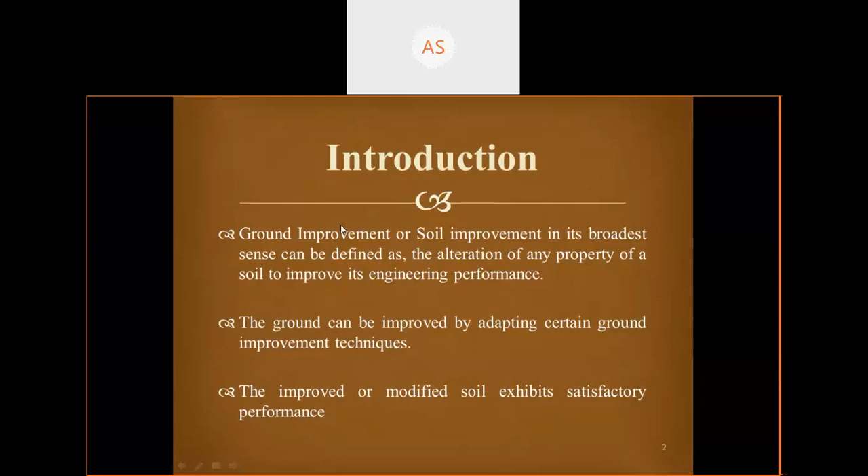Okay. So, all kinds of soil are not suitable for construction purposes, right?

These people are waiting.

So some soils are very weak and cannot support the structures. That kind of soil needs improvement. By applying certain techniques, the engineering properties of the soil are improved, and the application of those techniques to improve the ground so that it supports the structure on it is called ground improvement techniques. So it is the modification of the engineering properties of the soil so that it is suitable to take the load of the structure.

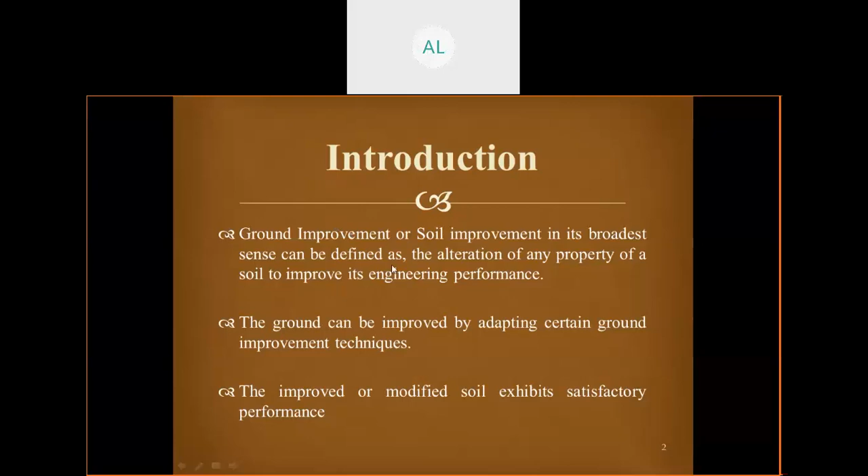Any structure, it may be a building, bridges, also construction of roads. So these types of techniques are available. It is written, you see, the ground can be improved by adopting certain ground improvement techniques. Then the improved or modified soil exhibits satisfactory performance. So after application of those techniques to modify the engineering properties, the soil should give satisfactory performance. So that is our introduction about ground improvement.

I hope it is clear. Anybody? Any doubt till this much? Is it clear to you? Any one or two, you can just unmute and say. Yes, ma'am. Clear. Okay.

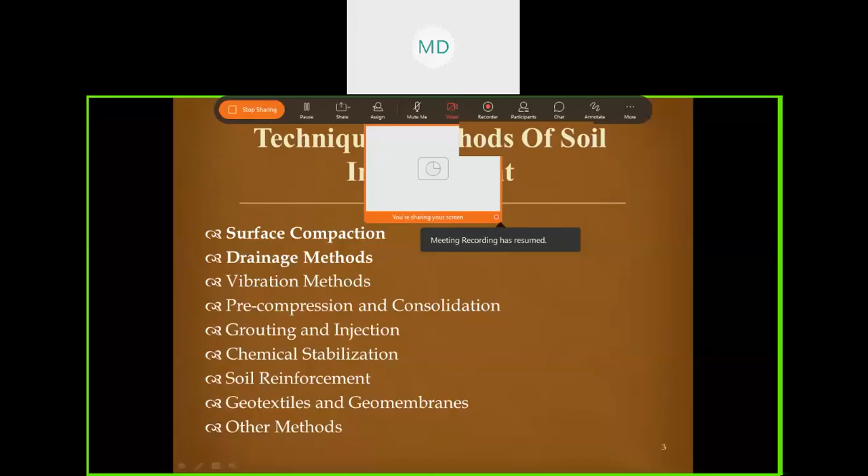So about surface compaction, can anybody say what is compaction? What is surface compaction? Anyone? Novojyoti Boro, removal of air. How do you remove the air? Any process? By the method of dynamic loads. Okay. Dynamic loads, then other methods, like rollers we can use, rammers we can use. Okay. Then next is drainage method.

Now what about drainage method? Anybody, any idea about drainage method? To increase density. Removal of excess water to collect surface water. Anything else? To make way for water to go out. Okay, fine. So avoid stagnation of water. So actually it is the removal of excess water by applying certain methods. That drainage setup is done so that the excess water is removed and the soil becomes suitable for construction. Like groundwater is removed.